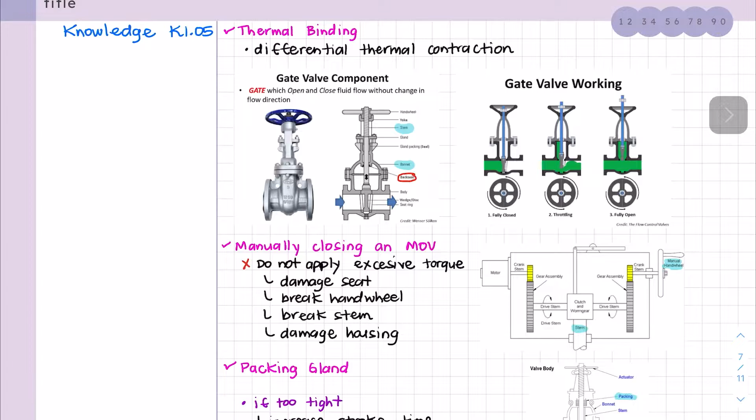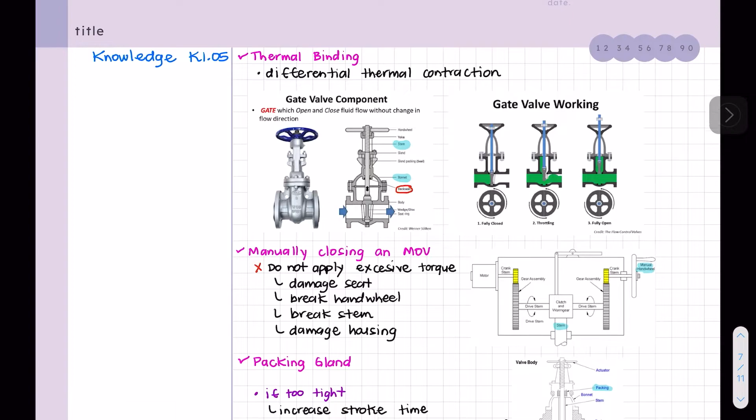191001, and we will review Knowledge 5. In this knowledge, we will learn a little bit about thermal binding, how to manually close an MOV, the packing gland, backseat, and interlock. That's all that we have for this section.

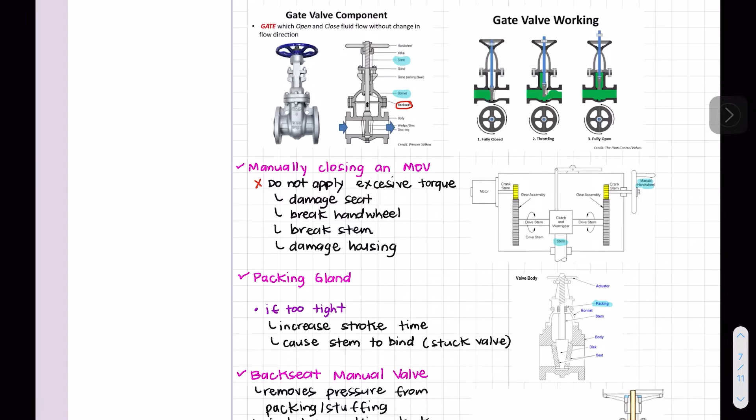So thermal binding, what is it? Thermal binding is a differential thermal contraction. It's generally associated with a gate valve that is closed while the system is hot and then allowed to cool before we try to open the valve. When this happens, we're gonna have different cooling rates across the valve because we have different materials across the valve, so it cools at different rates.

So what happens is that when we cool down for maintenance, this gate valve will internally cool at different rates and the valve can jam against its back seat. This is my back seat right here. That's what can happen, and we will go over what a back seat is. But yeah, so this part.

So here, this back seat is where it can jam, and this can cause different problems because it can make the valve inoperable, and we don't want that. So we want to make sure that we can operate the valve, that we can move it up and down with no issues.

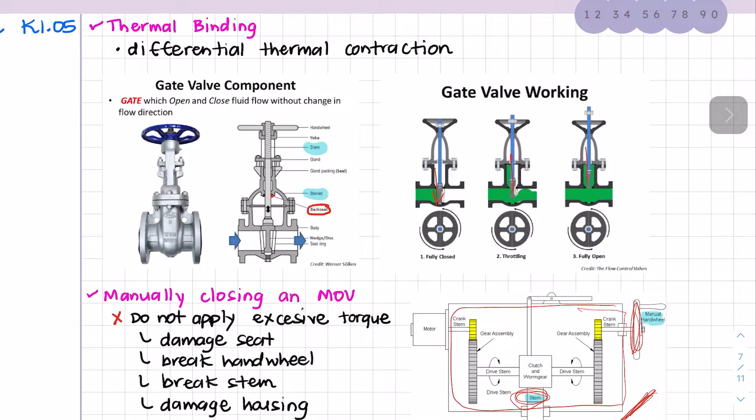So now we have manually closing a motor operated valve, as we can see in this picture here. On this type of valve we don't want to apply excessive torque, because several things can happen. If we close it very hard, we can damage the seat, we can break the hand wheel, we can break the stem, we can damage the housing. So we don't want to do that. Those are the things we will try to avoid while closing a motor operated valve.

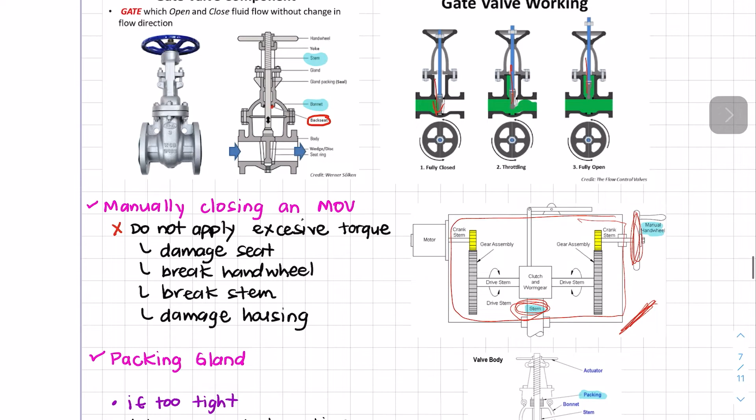Okay, so now we're gonna go to the packing gland. There are two things that happen if the packing gland is too tight: it's gonna increase the stroke time and it's gonna cause the stem to bind, meaning the valve gets stuck. The packing gland is this contact type sealing element that helps hold against the stuffing box. As the packing gland is tightened against the stuffing box, the compression packing between the two creates a seal for the leakage. So what we're trying to do here is avoid leakage.

So sometimes, if I over-tighten it, I might think I'm okay, but that might not be the case. The packing gland can be adjustable, so we can just untighten it a little bit more to decrease the stroke time. That's something we will want to do, decrease the stroke time. If we increase the stroke time, we know we have an issue with the packing gland, that it might be too tight.

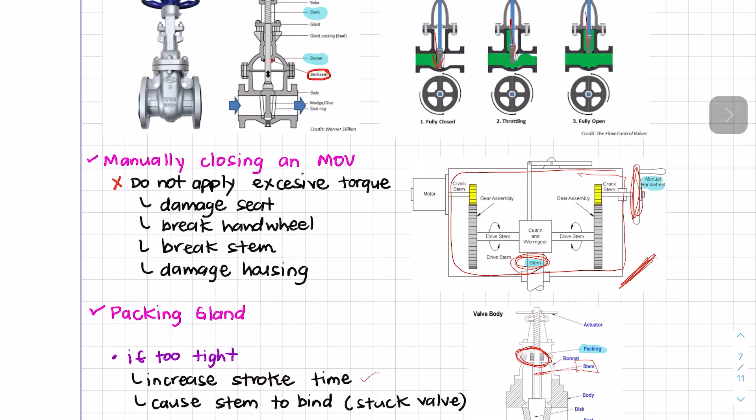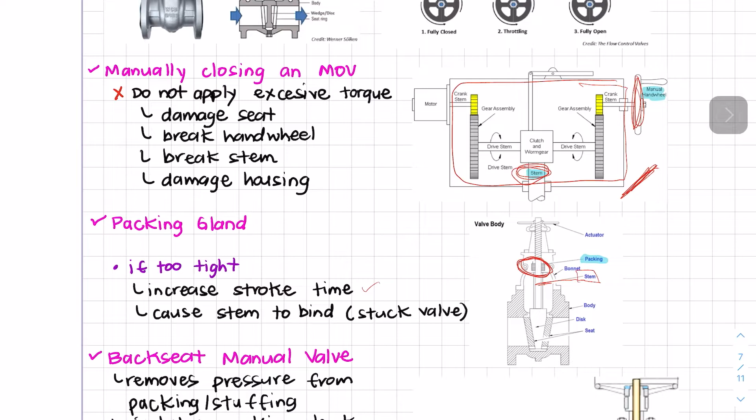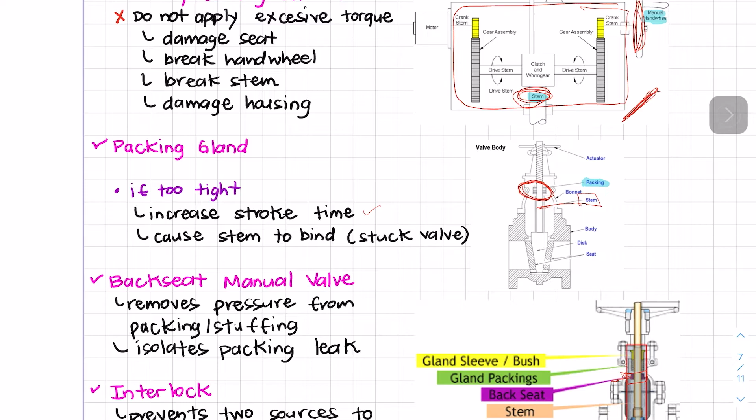Now we have another thing here, the back seat of a manual valve. The back seat is this seating arrangement inside the bonnet. So this is gonna be the back seat, and this is the bonnet. So inside the bonnet, we're gonna have this.

This back seat helps us on removing pressure from the packing with the stuffing, it helps release pressure from here. And it also isolates the leak in case there's a leak. So the back seat provides a seal between the stem and the bonnet, and it prevents the system pressure from building against the valve packing when the valve is fully open.

We usually have back seats often applied in gate and globe valves. The backseat should only be used to isolate the gland packing from the line medium, for example when the gland packing leakage is evident and until the valve can be depressurized and repaired. That's when we should be using them.

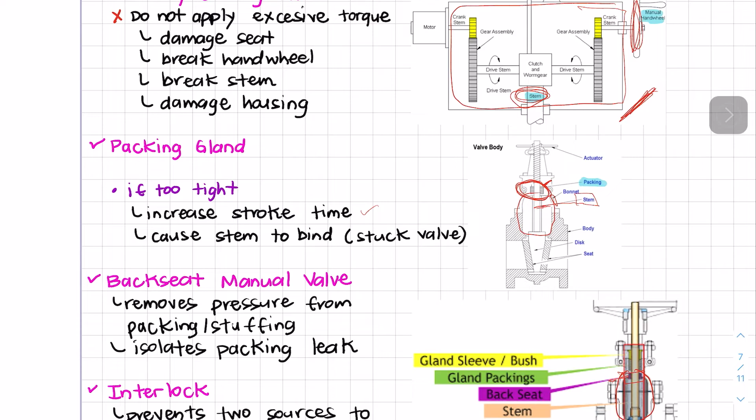And finally, we have the interlock. The interlock is gonna prevent two sources from being interconnected. For instance, if I am operating this MOV, this motor operated valve, the interlock is gonna say, I don't want you to use this MOV, let's close this one because I'm operating this one, or vice versa. If I'm operating this one, I'm closing this one. So it allows only one source to be connected to the pump directly.